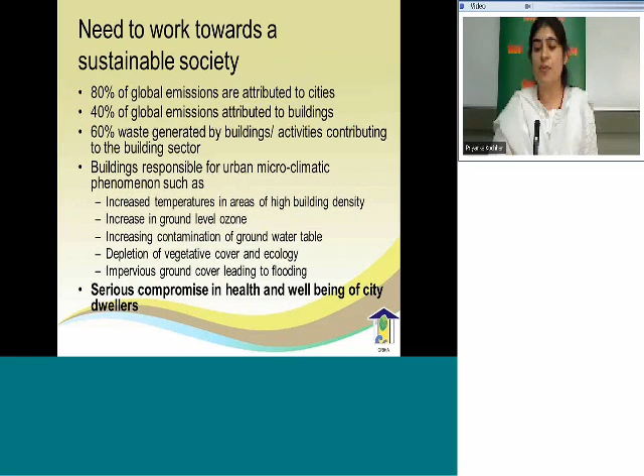And given that a significant part of our society follows these lifestyles that have such an impact, I'd like to look at some of the myths that are associated with lifestyles. One is that spectacles would equate to intellect. However, people who wear spectacles only reflect the fact that they are living or working in places that do not have enough visual comfort. That is to say, if there's too little light, or there is glare, or there are other issues because of which they're not able to see properly.

Similarly, because thermally it's not a comfortable place, either too hot or too cold, people have got used to using air conditioners and have started dressing in business suits, not conducive to our kind of lifestyle, especially in the summer. And glass buildings are perceived to be a status symbol, a perceived notion of development we've come to harness over time. However, glass buildings in many cases also require cooling in the winter, because of the large amount of heat that they absorb. And it's very different from traditional architectural practices.

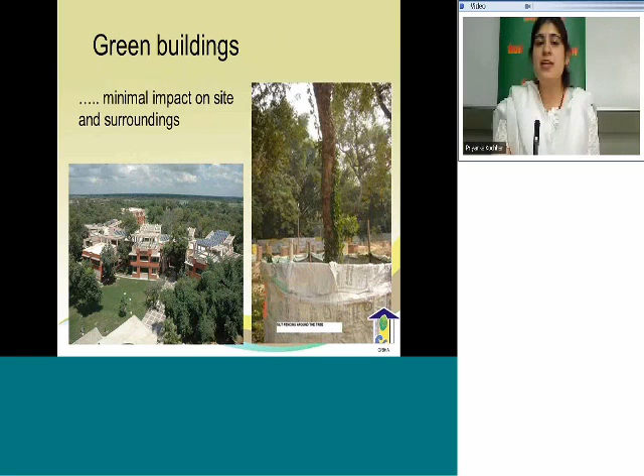Even when construction is happening, one must try and ensure minimum invasions on sites where construction is not happening, and projects that comply with this basic respect to site and surroundings would make a green building. Similarly, green buildings look at energy efficiency and enhance the use of renewable energy so that the pressures on grid and use of fossil fuel is reduced as far as possible. There are various tools available for analyzing a building design to see that the form of the building and shading due to the form can help in cooling or minimizing heat that comes inside the building.

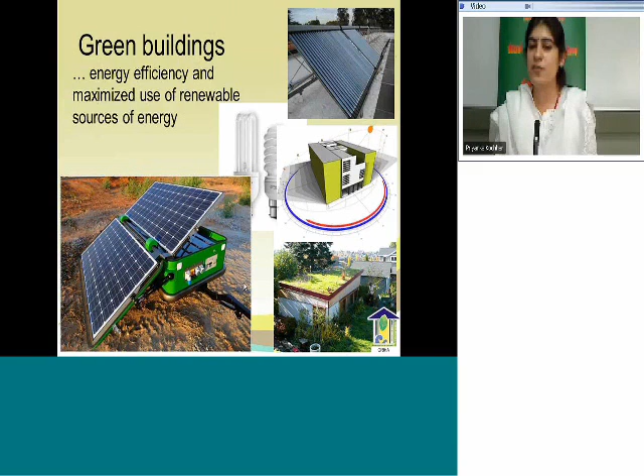Daylighting can be integrated here, so that once the heat intake is minimized or optimized, it can be provided for by efficient systems and as far as possible offset by renewable energy systems. Similarly, green buildings also endeavor to optimize or minimize the water requirements, not only within the building but also outside, such as for landscaping.

And see that solid waste segregation and other practices, there are provisions and ways to generate energy out of waste that can be included and contribute to resource efficiency further.

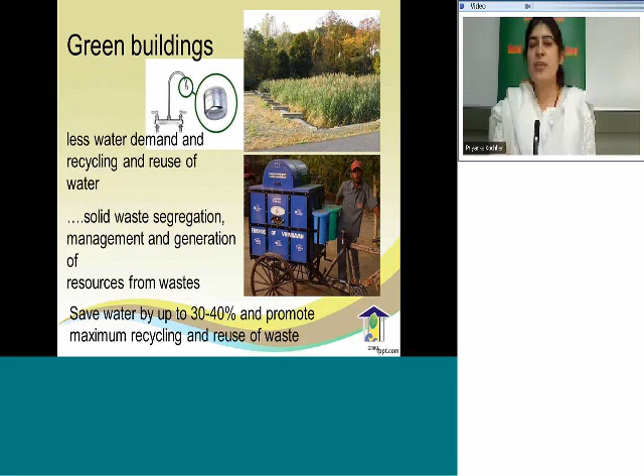A basic question that I am often asked is that if we incorporate one feature, say like rainwater harvesting or using CFLs, then would my project qualify as a green building? And secondly, what is the difference between making a green building and a rated building? I'm sure a large part of the audience may not be familiar with the rating system, but given the kind of questions I have been asked before this, I think it is apt that I bring it up here.

So while a building can be green by incorporating either of the measures that have been mentioned here, a rated building would necessarily have to meet certain parameters. So for example, for electricity consumption, a minimum kilowatt hour per square meter per annum, if that is achieved, and there are other aspects considered for resource optimization, then a building is said to be rated.

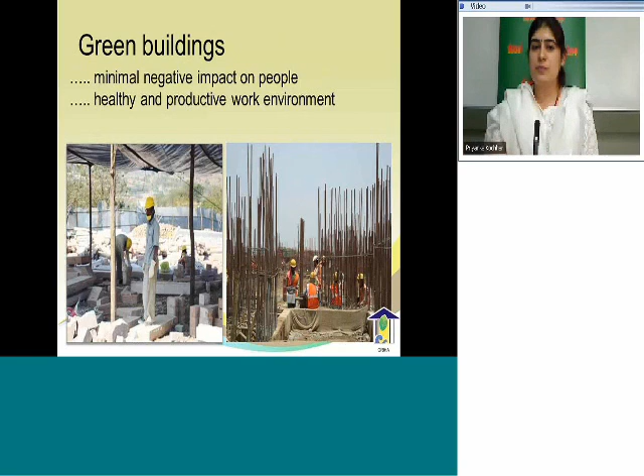How do these principles work at a building level? Because all this is very well in terms of energy efficiency, water efficiency, but fundamentally the buildings are designed to cater to two requirements. One is to ensure that the people or the occupants inside the buildings are comfortable and they can work and carry on day-to-day activities easily and effortlessly. Why I say this is because one way of looking at a building is that we can switch off all the systems, we can switch off the air conditioning, the fans, save electricity but not be comfortable inside.

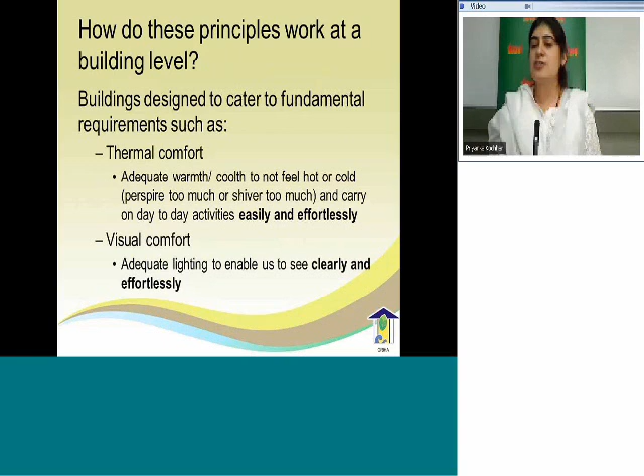So with the prime objective of ensuring that the occupants are comfortable as far as their physical surroundings are concerned and as far as visual comfort is concerned, with this major objective is the need for use of electricity in these buildings. So just to give an example, I'm going to just give an example of this.

If we have a building, say typically in a place like Delhi, which in summers needs to be cooled and in winter needs to be warmed, then the typical source of heat is the sun, because the sun is going to be responsible for a lot of heat that comes in. So there are sun rays that come from here like this and from here, and therefore it is important that in order to maintain thermal comfort inside and be comfortable in terms of temperatures that are maintained, we have to ensure that there is minimum heat gain from the envelope, which is essentially the roof, the wall and the window.

After this, once we have optimized the heat that comes inside the building, our next strategy should be, and ideally is for all buildings, to control or optimize the heat that is generated within the building. So for example, a light bulb is a source of electricity consumption and heat generation within a room. There are appliances that can be used. There are people who are within the building, and all of these contribute to generating heat. So when there is heat coming from outside and there is heat being generated inside, in order to be comfortable, we need to put ventilation techniques or fans or air conditioners, and which is where we need electricity.

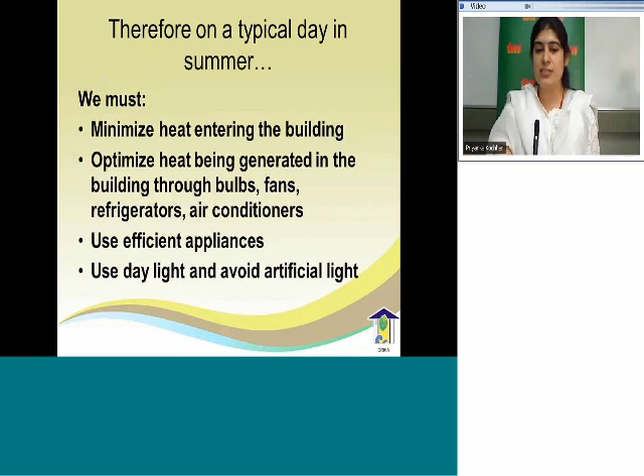Just explaining a little bit more and coming back to the first point on how we can minimize heat penetration, you can see that the sun's rays are coming through the roof. So there are various treatments that can be given to the roof. There are ways in which we can work on the ratio between the wall and the window, because like you may be knowing, more heat can come in through a single normal glazed window, single glass, and it will take the heat longer to penetrate through a wall.

And of course, in order to ensure that the heat does not come in and that light comes in, there are various types of glass that can be used. There are also shading devices that can be used, which ensure that usable daylight comes, because unfortunately what happens several times is that if there is a lot of glare that comes in from the window, we are forced to put curtains or blinds. As a result, we switch on lights and bulbs and all of that, which again leads to heat generation and electricity consumption.

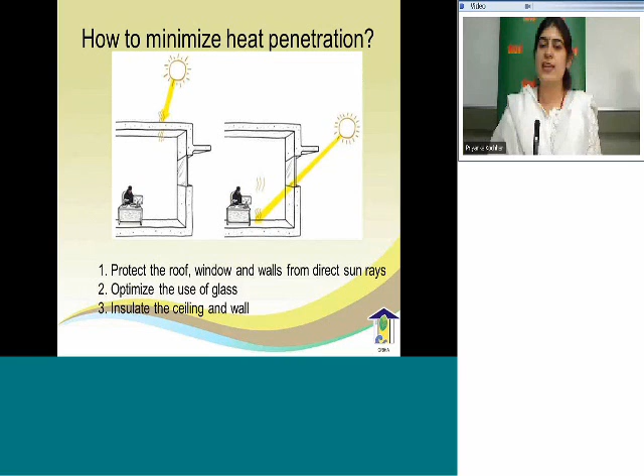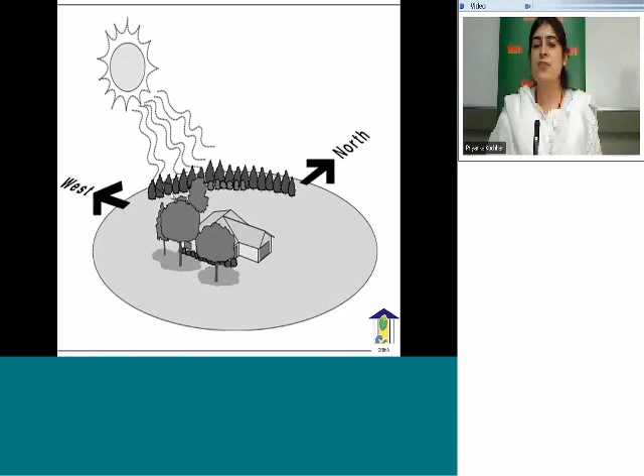This is just an image that shows how shading can be used. So for example, west, which in our conditions is the direction from where maximum amount of heat comes, could be shaded with trees, or at a micro level we can look at insulating the roof. In this case, we've used a garden to ensure that the heat does not directly come inside the room, which has to be made comfortable for the user.

This is another example where inverted pots or ghadas, as we commonly call them, have been used, the only drawback being that even though it's a low-cost technology, the terrace is rendered unusable. So people who have a lot of physical space available can use this strategy, and because essentially you are increasing the thickness of the roof, the heat penetration and the rate at which heat transfers from the atmosphere or from the sun to within the building gets delayed significantly.

Another example, and this was done a lot traditionally, is the use of kulhads, and as you can see over here, they have been used as roof insulation on a terrace. And of course, the final coating can be of any material. It could be broken china mosaic or any other suitable thing. But again, this is essentially increasing the thickness, which will delay heat from entering from the roof inside the building. This is another example of a china mosaic finishing, which will reflect, so which will not even allow the heat to come inside the floor.

Another useful strategy that may be used and is cost effective is the use of cool paints or high albedo paints, where a 5-degree surface temperature difference can be experienced, and because of that, the heat generated in the floor just below the roof is less by 5 degrees. Therefore, in air conditioning and other loads, we will save up to 20% power.

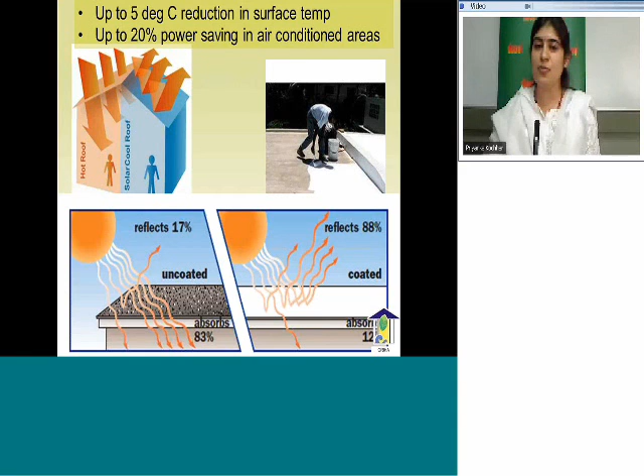There are several easily available Indian brands as well, and I've also put a certificate of a GRIHA identified and GRIHA certified product, which is a cool roof that can help minimize the heat that enters the project. I do have a video to show how these cool roof paints are applied, but I'm going to take it towards the end of the webinar.

Now, having looked at minimizing heat penetration through the roof, I move on to the window and the wall. And like you can see in this image, the wall will allow less heat to come in as opposed to a single clear glass, which will of course allow a lot of heat to come in. As a result, so much heat has to be removed from that space, thereby increasing the demand for cooling or air conditioning to meet the thermal comfort requirements. These are images that show how different levels or percentages of the window wall ratio can be used.

So essentially, if the daylight requirements have to be met, it can be designed such that there is a good balance between the window and the wall, and by the policy recommendations that have been identified by the Government of India, ideally the window wall ratio should not be more than 60%.

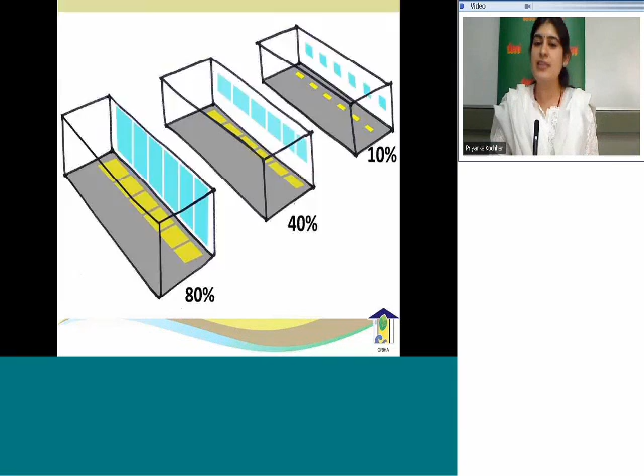Even though a current trend and what is in fashion is that fully glazed buildings are seen, even in that scenario there are ways to choose glasses which allow the visible spectrum to penetrate and prevent the heat from coming in. And these types of glasses could be used to ensure that our buildings do not become greenhouses.

So this is just an example. This could be anywhere in the country or anywhere in the world. And had these buildings been made of single clear glass, single glazing, which is most commonly seen, these would need extensive cooling in summer and sometimes even cooling in winter, because a lot of heat is caught up and it gets trapped in these buildings.

This is an example, and a very old example, of a good building where the window wall ratio has been looked at suitably. So you can see that all the windows are shaded and that there is less than 60% of glass that has been used to ensure that the heat gain is optimized.

Another factor that you would have seen in traditional buildings is that the walls used to be very thick, the idea being again to delay the heat penetration into the given space. And while it is not possible, we do not have the luxury of space or the luxury of availability of material or skill, we are unable to construct such thick walls. But of course, this technique has been adapted over time.

And you can see here that insulation, in this case used as a cavity insulation between two walls, can be used to have the same effect, which again delays the heat that comes inside the building. So these are some generic strategies which could be applied for any upcoming building to ensure that the heat which is coming in from outside to inside, which essentially adds to the discomfort of the occupant, can be controlled.

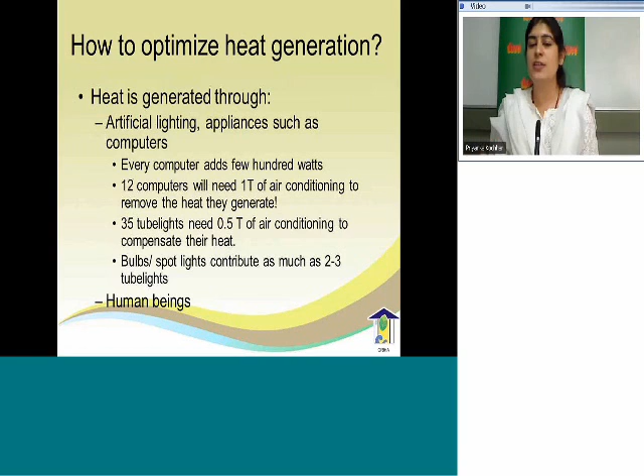And therefore we should avoid using bulbs where, like I mentioned, the outside temperature of a glass bulb would be anything in the range of 130 degrees centigrade, while that of a CFL is significantly lower. So not only are you getting light, but you are also minimizing the heat generated, which will again reduce the load on your air conditioning system.

And of course, I'm sure most of us here are familiar that the Bureau of Energy Efficiency has developed the BEE star labeling, which has been mandatory since 2012 for various appliances, including refrigerators, tube lights, air conditioners, and so on. And this is something that should be used and is now mandatory for everybody to use.

But the critical question is, how should I choose my air conditioning? Now, a lot of queries have come around air conditioning and use of fans and so on. So I'm going to focus on efficiency of air conditioning systems, because that is something we all take as a given in our current lifestyle.

And this is just an example where we can figure out how sizing of a system is done, because typically a challenge that is faced by people is, how do I find out what is the right size or the right tonnage for my air conditioner? Tonnage basically indicating the amount of heat that has to be removed from that space.

So after we have identified the size of the air conditioning system, because what will happen is that if I choose, say, a 2-ton air conditioner for a room that may suffice with 1 or 1.5 tons of refrigeration, then depending on the set point that has been identified, the system will stop working after some time. But it may not be a cost-effective option. Therefore, it is important to choose the right size, because it is going to have a direct impact on the cost.

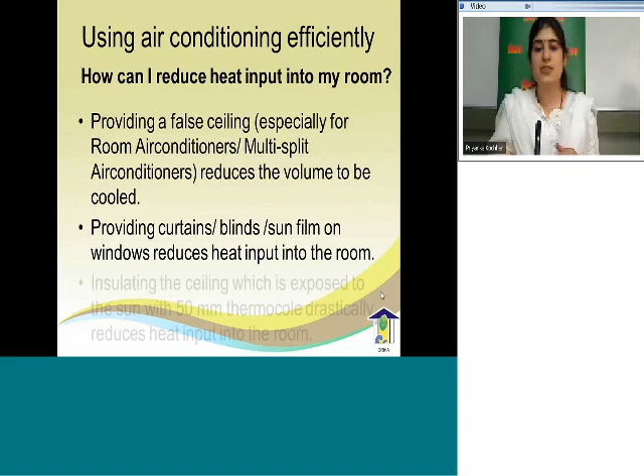Now, furthermore, the purpose of putting the air conditioner is to remove the heat from the room, and like we have used architectural features, insulated the roof, the walls, figured out the window-wall ratio, and so on. Still, if we haven't been able to address these issues for some reason, we can put a false ceiling. This is not specifically for residences, but essentially what one is doing is reducing the volume that needs to be cooled. Provide curtains or blinds. Thick curtains help, because even if the heat has come inside the room, it further prevents dissemination to the area occupied by the person, and insulate the ceiling which is exposed to the sun, which will have a significant impact on reducing the air conditioning size.

Another common question is whether a person should use a window unit or a split unit. I'm not explaining what these are, because I'm sure everybody is familiar with this. The basic difference, and the thought which can really help make the decision, is that a window unit facilitates induction of fresh air, whereas a split unit may be a little bit more costly. It is usually used in places where there are no windows or there is a crunch of space, but there is no direct or immediate fresh air circulation that happens. As a result, it can have an impact. So one could use a split AC in a room where there are doors which swing open and allow some kind of fresh air to come in, and so on.

And then the typical question is how do you decide the placement of an air conditioner? The ideal condition is that the direct draft should not come either on the face or to the occupant, because while your body temperature is 37-38 degrees, the air is released from the air conditioner at 13 degrees, and it will make the person feel very uncomfortable. So it's best that it is placed behind you at a height of about 5 feet, so that full ventilation within the room can happen as well, and fresh air also gets inculcated in this.

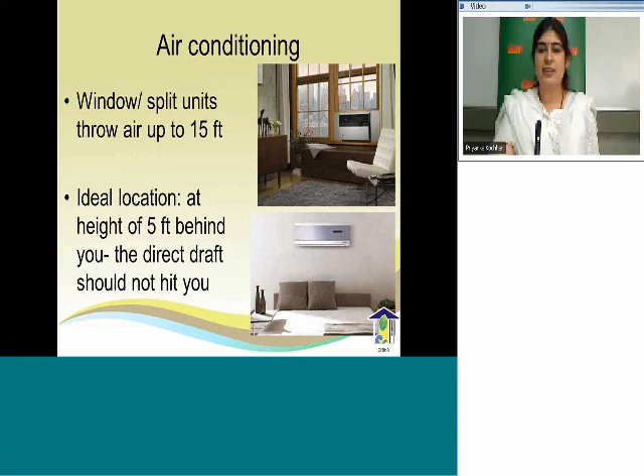I have interestingly received a query from one of my former colleagues asking if it is more efficient to run an AC at 20 degrees centigrade or to run it at 24 degrees and then use a ceiling fan. Now, thermal comfort is why we are using a fan or an air conditioner. And this comfort, as per the National Building Code, has been defined from 23 degrees to 26 degrees. And of course, humidity has an important role to play here. What has been defined in the code is that between 50 to 60 percent relative humidity an occupant would be comfortable.

Now definitely 20 degrees is not advised by any standards, but suppose I use an air conditioner at 24 degrees and increase the velocity of air. Normally, we can say that the velocity of air is 0.5 meters per second. If I use a fan and it increases to about 1 meter per second, then I can easily enhance my set point by 1.5 degrees. Of course, there are several generalizations in this statement, but I personally feel comfortable at 24 degrees. It could be anything between 23 and 26. With a fan, I can easily change the set point to 25.5, and the fan is going to have that kind of an impact.

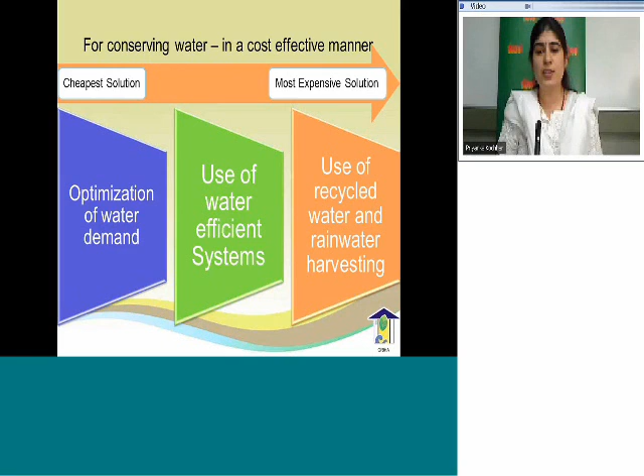Okay, now moving on to water, which is something I've taken up very briefly. The same strategy can be used to conserve water as a resource as well, and one needs to first optimize the water demand. So try and save water during day-to-day use, say in the kitchen or the bathrooms, or watering the plants, washing the car, and so on. Use efficient systems that may be for irrigation and so on, and then use of recycled water and integrate rainwater

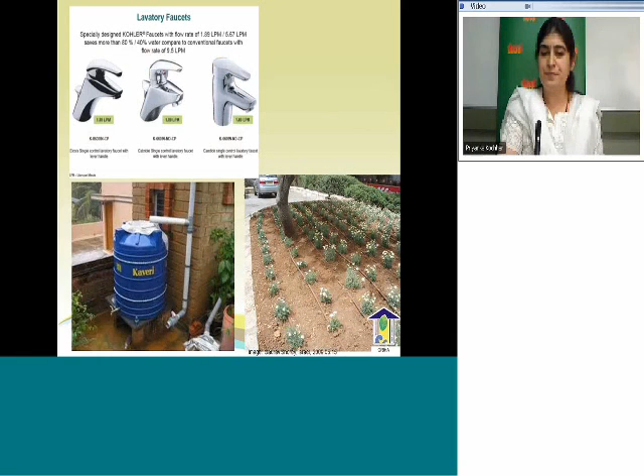harvesting wherever possible. The simple things that can be done are, say, one can use efficient faucets, or this is just an image that shows drip irrigation system in Israel, where the plants are watered near their roots, and this is a simple rainwater harvesting system that has been showcased. This is another example of grey water recycling system that can save a household up to 5,000 gallons of potable water per year. It's a simple equipment that can be put together and can be used.

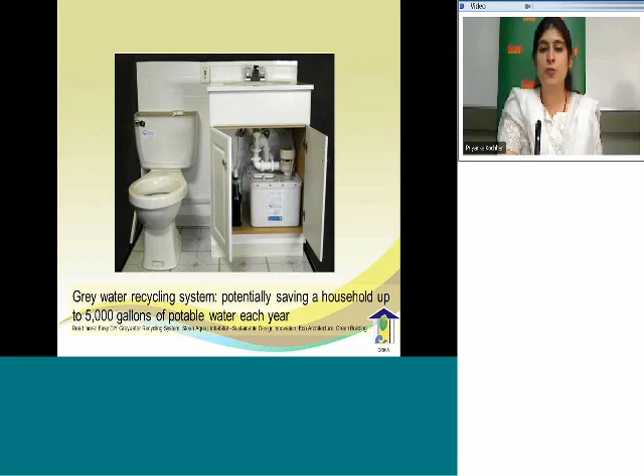Right. I want to understand how RO systems contribute to water waste and water energy. I think you've already received the answer. There is no win-win situation, but if possible, recover the salt by evaporation or any other technique, rather than dispose it off to the surface drains. And what are the other questions?

Where do we get grey water recyclers in India? I can find that out and get back to you. Does government provide any support to encourage their sale? Actually, it's unlikely. I'm not aware of it, but it's unlikely that the government would give financial support. People do not have much awareness about these things. That's right, I agree. And that is not only for water-related matters, but several other issues around sustainable habitats that need to be addressed.

Does it harm to install an AC with higher ton capacity than required for the room? It harms in the sense that it's going to be an expensive proposition. You'll use it for lesser time. If your set point has been set correctly, it will switch off and not work. But why do you want to spend that initial money? Because bigger air conditioners are more expensive.